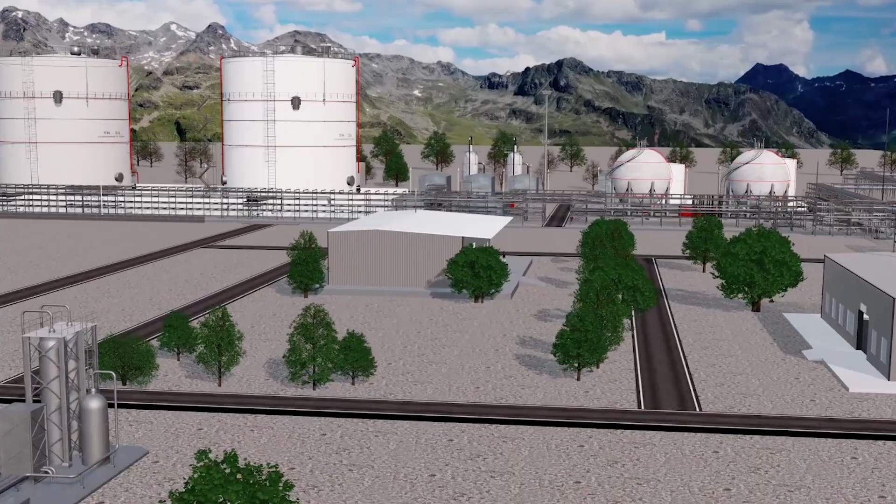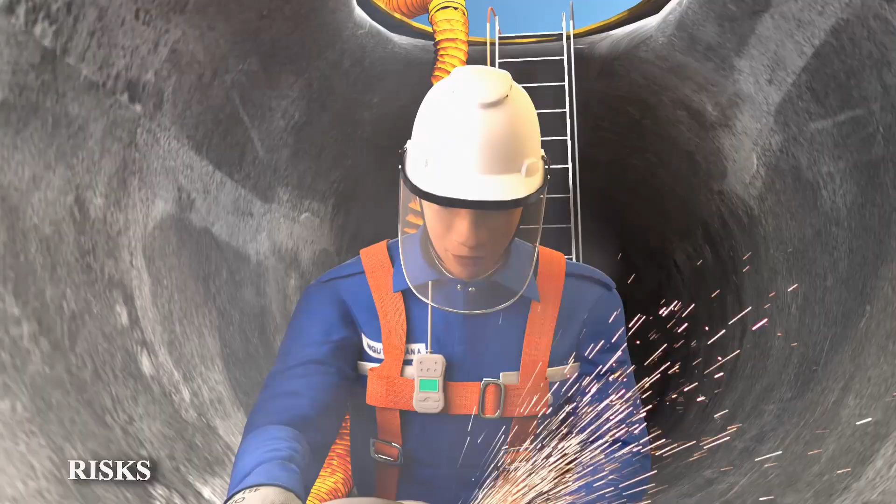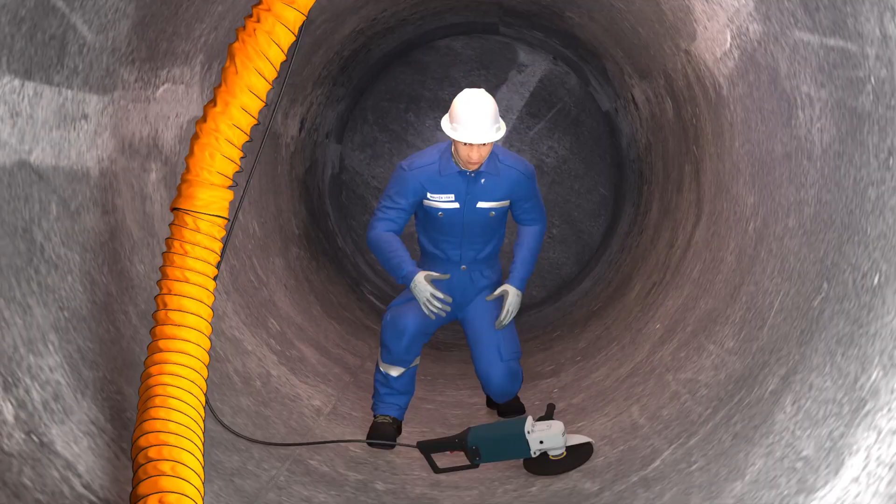Cutting and welding generate sparks. The potential risks are explosion, eye damage, burns due to exposure to hot metal, electric shocks, respiratory disease caused by dust, toxic gas, and accidents. The risks are further worsened when working in confined space, working at height, or near flammable or explosive chemicals. Therefore, to ensure safety, please keep in mind some important safety instructions for cutting and welding below.

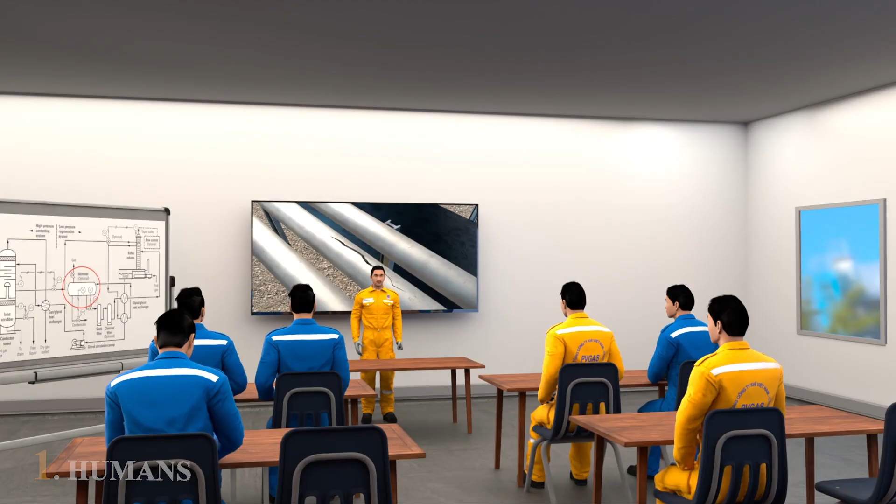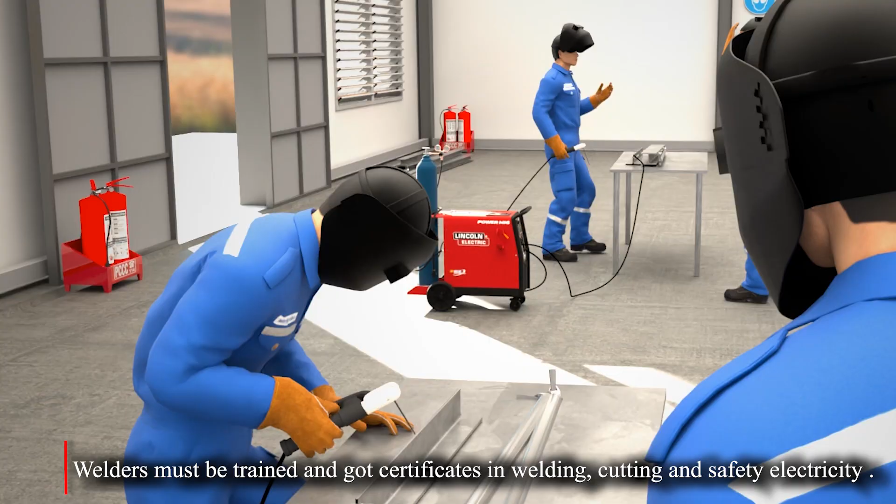To humans: all workers working directly and indirectly must be fully trained in occupational safety and health and firefighting, and be granted certificates in accordance with legal requirements. Welders must be trained and certified in welding, cutting, and electricity to be allowed to do this work.

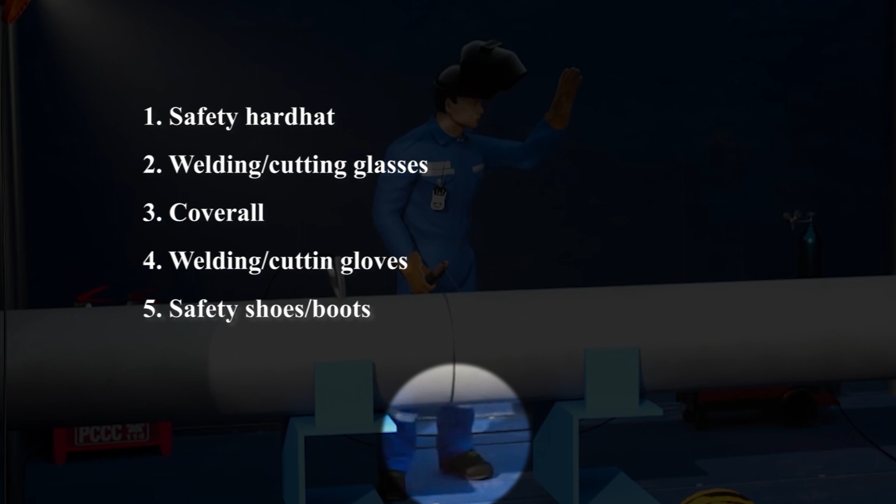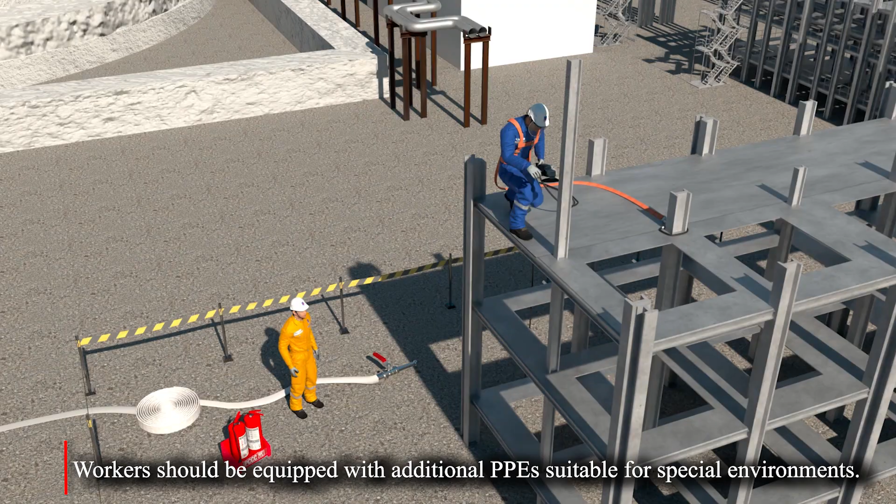All participants must be equipped with personal protective equipment, PPE, including safety hard hat, welding and cutting glasses, coverall, gloves, safety shoes, boots, and other PPE for effective prevention from harmful effects of hazardous factors as prescribed. If the working environment involves contact with chemicals, electromagnetic fields, confined space, work at height or toxic gas, workers should be equipped with additional PPE suitable for that special environment.

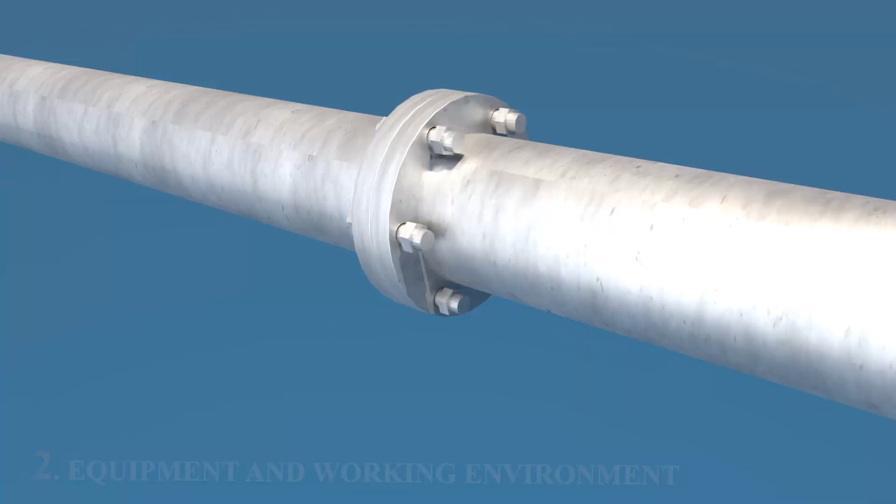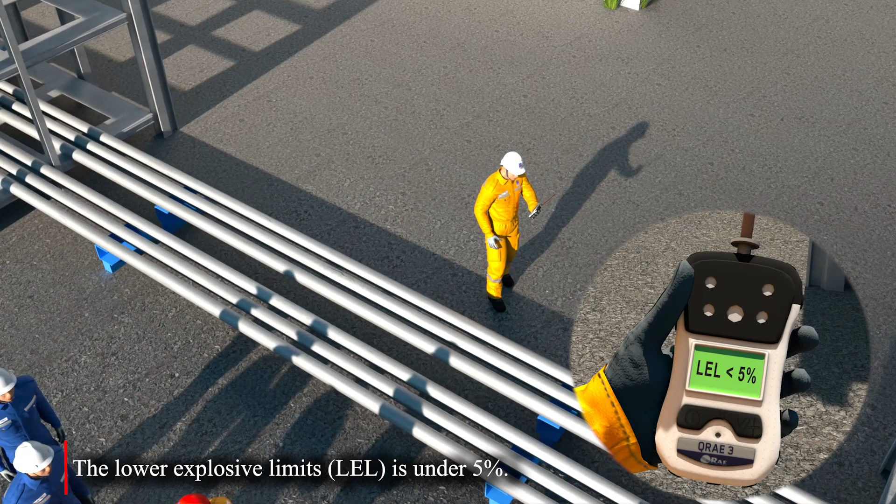Two, equipment and working environment. Pipelines and equipment must be cleaned, isolated by standard blind flanges, and purged by nitrogen. Flammable gas concentration inside and outside of the working area must be monitored during welding and cutting operations. The lower explosive limit is under 5%. Cover the working area with flame retardant material and set up warning tape to prevent unauthorized people.

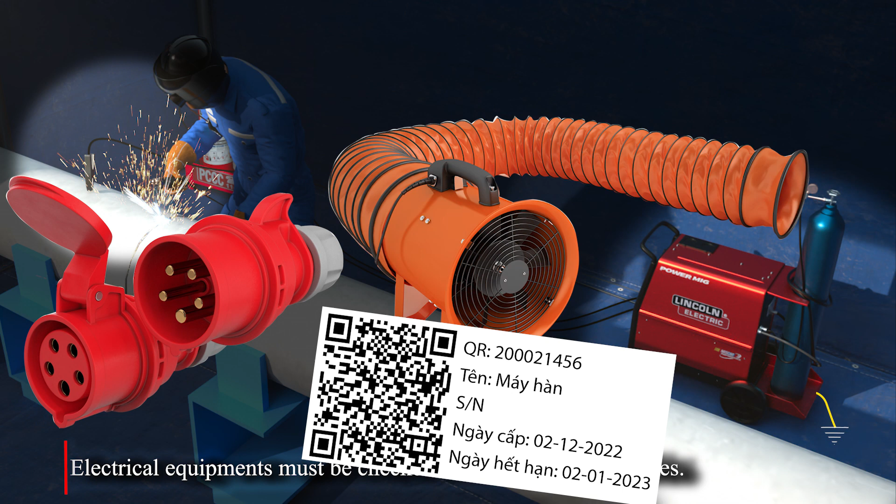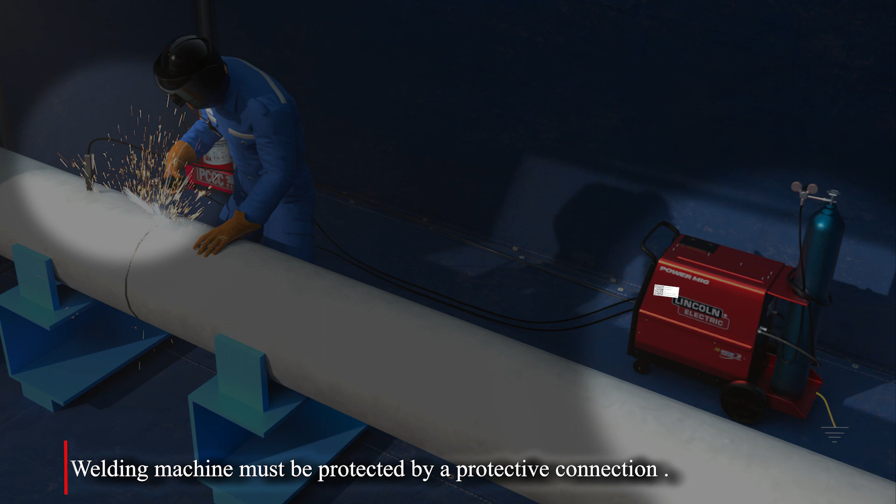Electrical equipment such as welding and cutting machines, electrical jacks, and air blowers must be checked and stamped. Especially, gas cylinders must have a valid inspection certificate. Backfire prevention must be installed after the pressure reducing valve. Welding machines must be protected by a protective connection to standards to avoid electric shock. Each welding machine must have a separate CB.

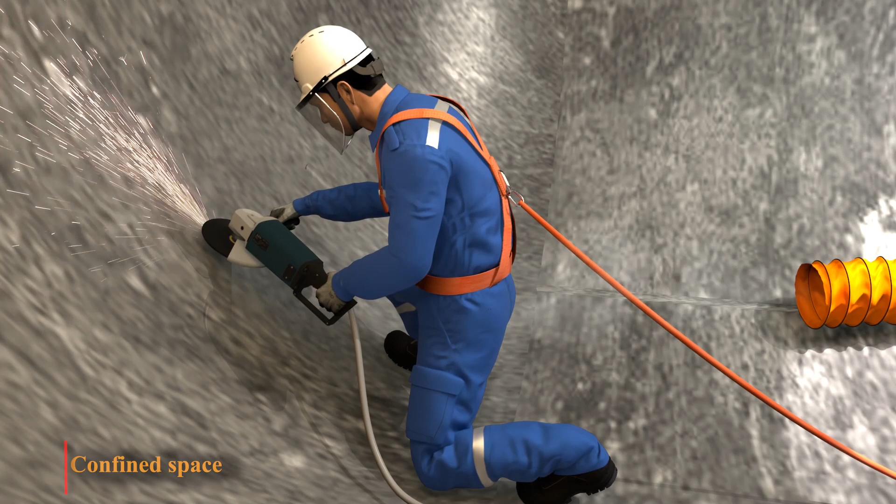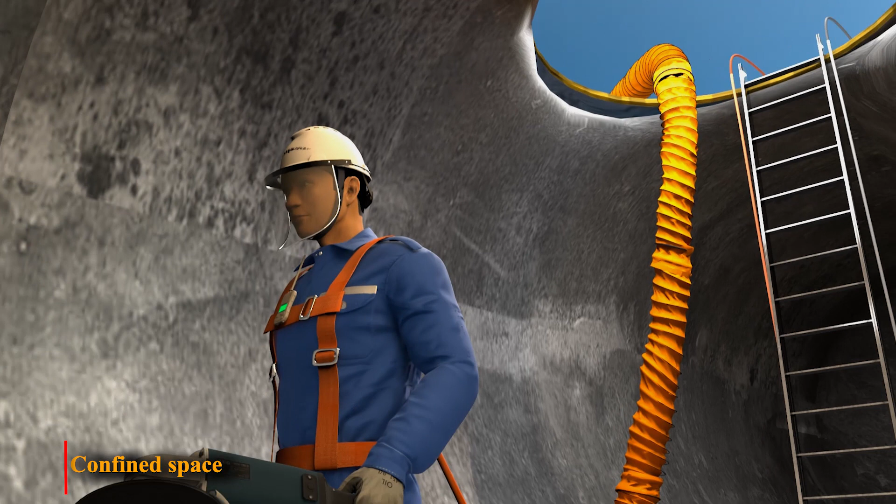When welding or cutting in confined spaces, such as tunnels, barrels, or closed tanks, they must be cleaned to remove toxic gas and ventilated with fresh air. Arrangements must be made for vacuuming the pipeline to ensure flammable gas concentration is under 5% lower explosive limit, hydrogen sulfide concentration under 10 ppm, and oxygen concentration in the range of 19.5% to 23.5% volume.

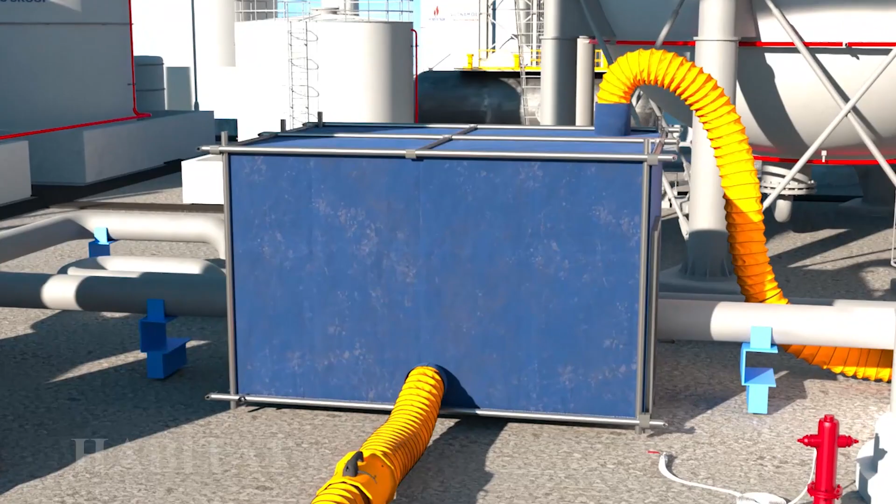Zone 0 and Zone 1 are areas with high probability of the presence of flammable gas, and a habitat has to be applied. A habitat is an enclosed space for hot work, which is able to maintain a higher pressure than outside to block invasion of flammable gases from outside and contain sparks and welding slag created from inner operations. Maintain a minimum pressure of at least 25 Pascal. Monitor pressure inside the habitat by an externally mounted barometer.

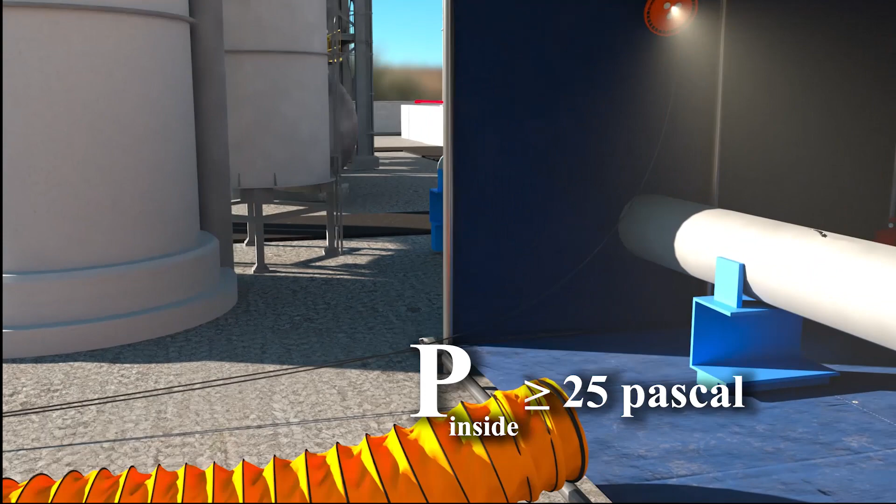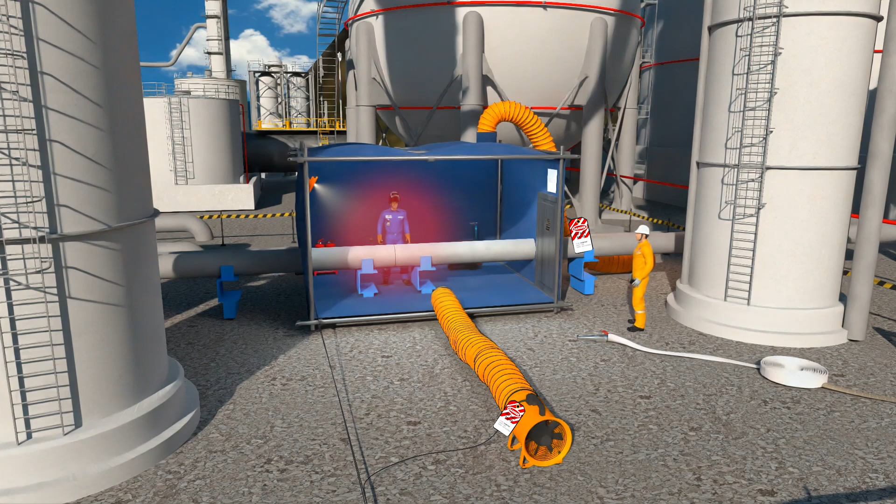The habitat's wall, roof, and floor must be made of flame retardant material. The ventilation system must be marked: for habitat, do not move. Fresh air has to be taken from a safe zone, ensuring continuously clean air for workers. Hot and toxic air must be blown to the outside area. Provide sufficient lighting in the habitat. Be equipped with powder or foam fire extinguishers inside, and firefighting hoses outside.

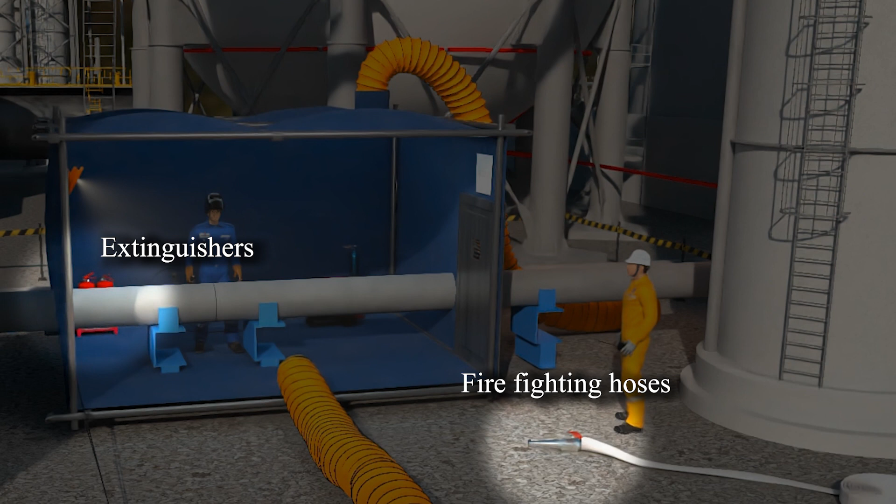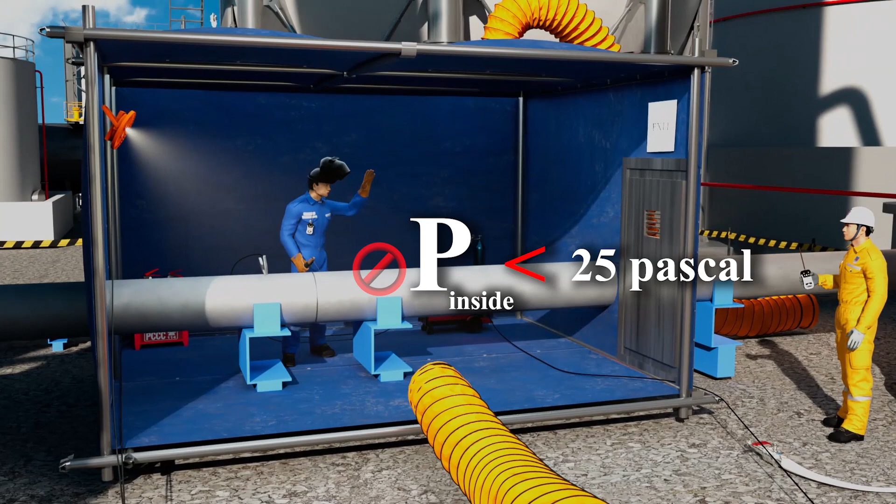A fire watcher is required outside. The exit door has to be clearly marked inside and outside. Habitat windows should be transparent to allow observation. In case of pressure drop, immediately stop work and check the sealing joints. Only resume the work after getting approval from an authorized person.

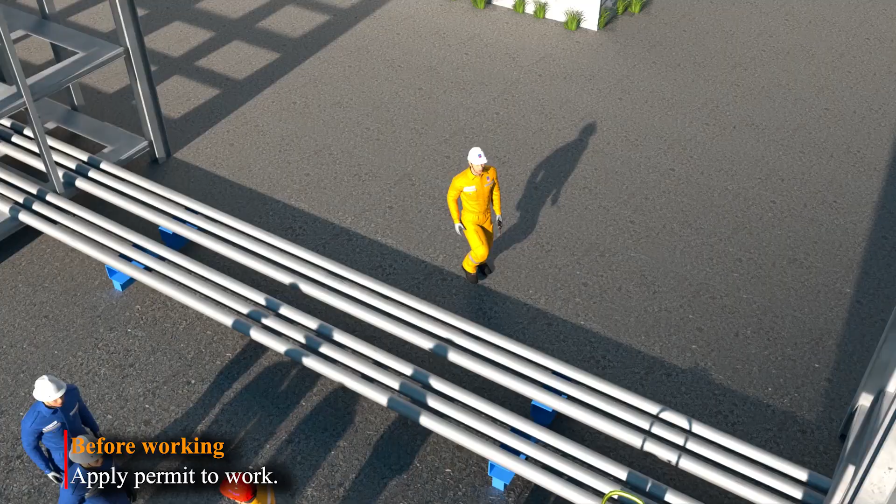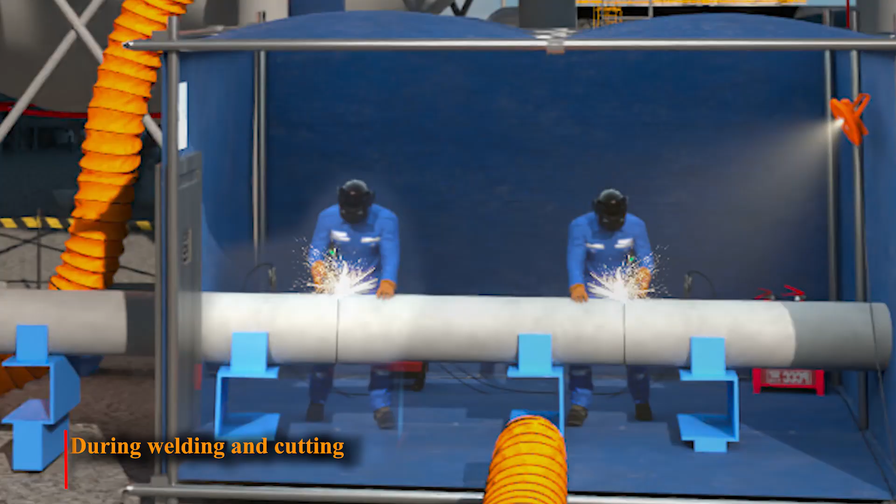Before working, it is required to carry out a job safety analysis for welding and cutting, and inform all workers. Apply permit to work according to PVGAS requirements. Check safety conditions before working. During welding and cutting, continuously monitor gas to ensure its concentration is under 5% LEL. Arrange a fire watcher and fire extinguishers right at the working place, corresponding to one person for an area of about 15 meters. Distance between welding and cutting positions must be not less than 1.5 meters.

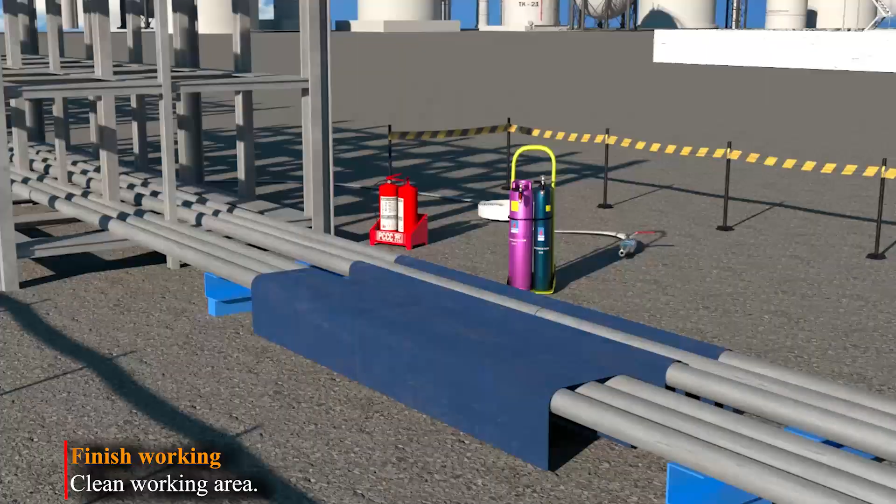Finish working. Cut off the electric power of the machine. Lock the gas supply and exhaust all the air in the duct. Clean the working area and close the work permit.

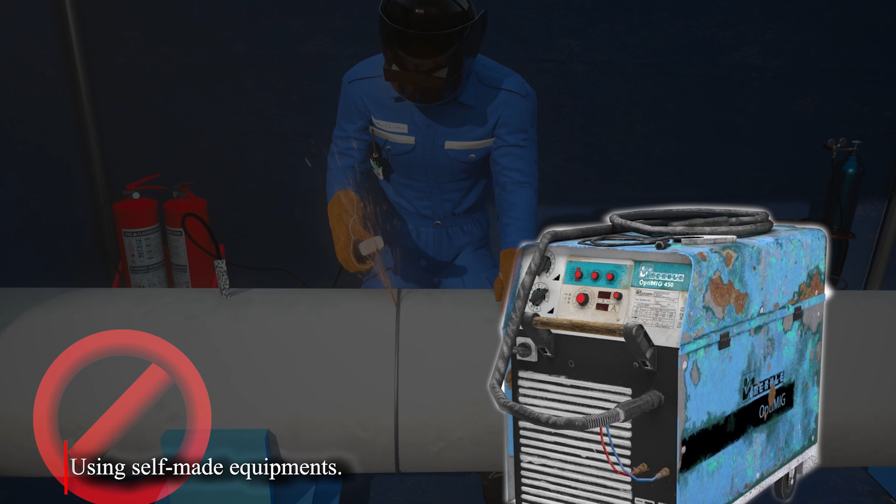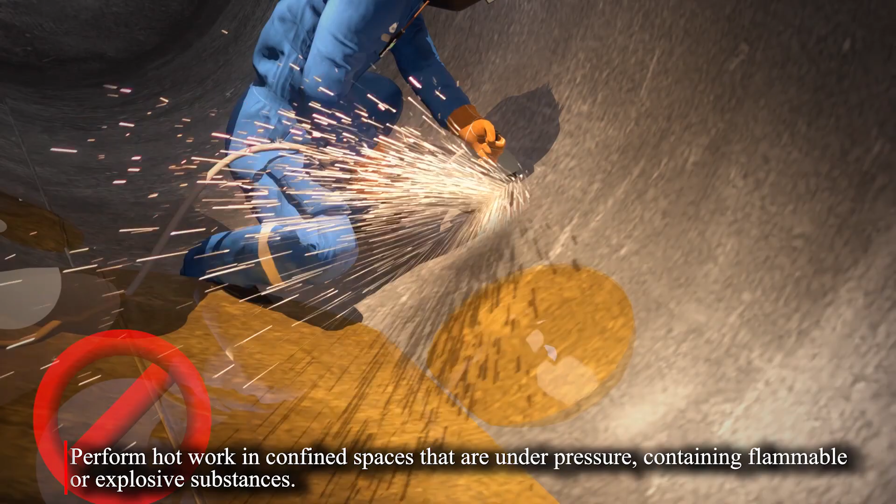Prohibitions: working without a permit to work. Using self-made equipment, or equipment with damaged insulation protection. Grounding equipment through metal structures, technological equipment, or pipes that are not welded objects. Using power supply directly from lighting or the electric power of the pump. Performing hot work in confined spaces that are under pressure or containing flammable and explosive substances. Performing hot work in areas not isolated from flammable and explosive materials.

The safety introduction comes to an end. If you have any questions, please contact the safety officer for further guidelines.